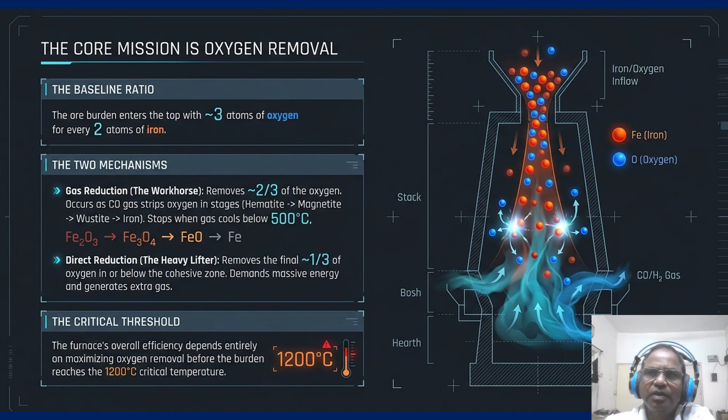Now, coming to the permeability bottleneck, the furnace speed is dictated by the permeability bottleneck. As we all know, to keep the process moving, blast pressure must accelerate gas to roughly 200 meters per second at the tuyere. The ultimate resistance is the cohesive zone, where softening ore creates a barrier. To overcome these, the gas relies on the central coke chimney and alternating coke slits to ascend. We must remember that the fastest burden descent always occurs exactly where the gas can create most voidage.

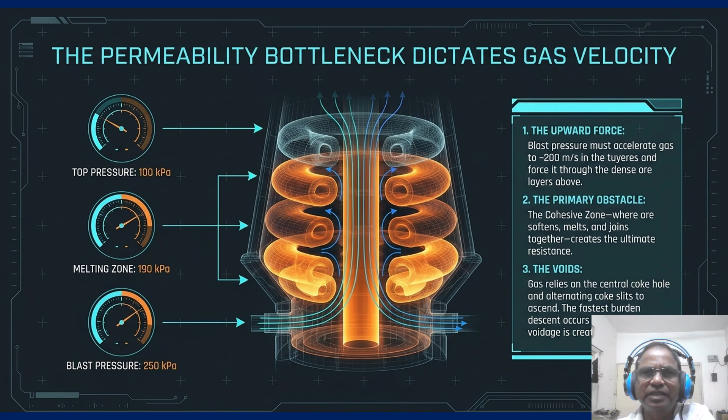Now, as you can see, the two profiles, that is the two signatures, we typically see two distinct flows, that is central working and wall working. Central working or the inverse V is our goal because it utilizes many active coke slits and keeps heat away from the shell. The wall working, the W shape, is dangerous. It forces gas to the wall, leading to high wall wear risk and vulnerability to water leaks. As operators, we must recognize these signatures early to protect the refractory and maintain a stable flow.

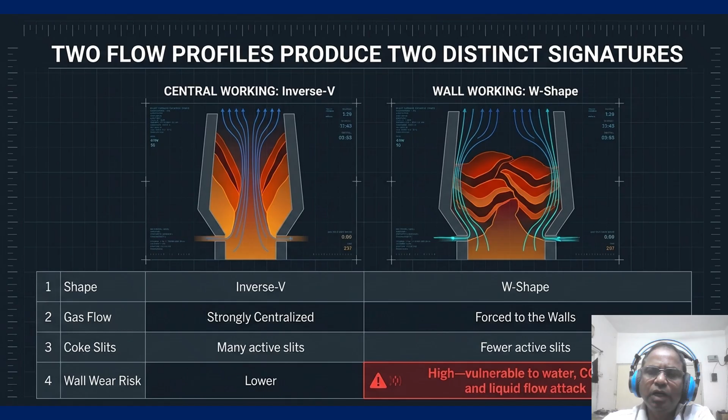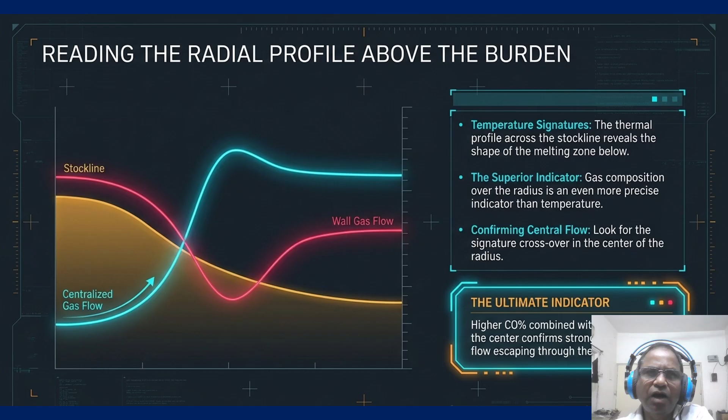Now, coming to the reading of those radial profiles, that is, above the burden. So to confirm our flow, we look at the radial profile above the burden. While temperature signatures give us a hint, gas composition is the superior indicator. Specifically, look for the signature crossover in the center of the radius. If you see higher carbon monoxide percent combined with lower in the center, it confirms you have a strong centralized gas flow escaping through the coke chimney. These data tell us exactly how our internal inverse V is shaped.

Now coming to balancing the central flow trade-off. So there is a constant trade-off in the central flow. The benefit of the central flow chimney is vital. It guarantees permeability and protects your walls. However, the cost is energy efficiency. If the chimney is too large, excess gas escapes unused, showing up as high top temperature and wasted chemical energy.

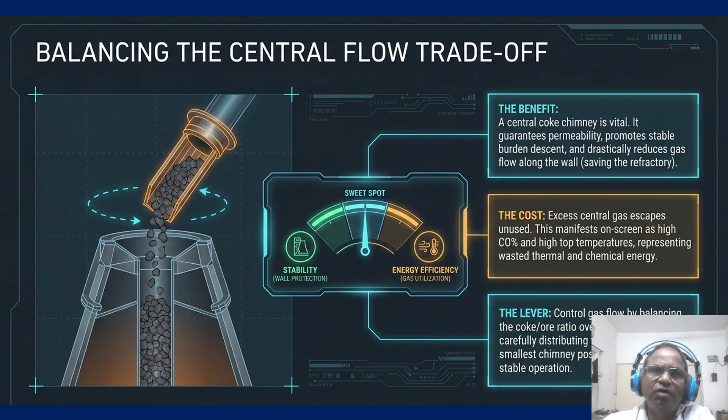Your lever here is burden distribution. By adjusting the coke to ore ratio and carefully placing fines, you aim to maintain the smallest chimney possible that still ensures stability. Tracking the cascade of irregular burden descent.

We must track the cascade of irregular descent before it becomes disaster. It starts with a hanging, where the stock line stops moving because material is bridged in the stack. This leads to slipping, which is the sudden uncontrolled drop when that bridge finally collapses.

Your primary real-time indicator for this is blast pressure. If you see erratic pressure variation while the blast rate is constant, the furnace is warning you of an impending irregular descent. And this also signifies that it is going to affect our production very badly.

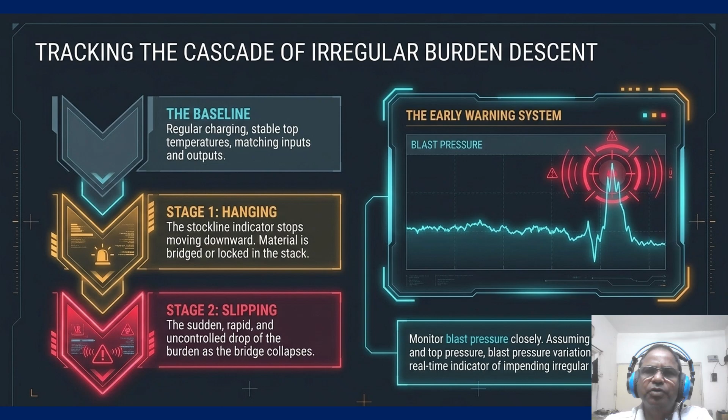So now coming to the high residual liquid choke permeability. When cast house drainage is poor, high residual liquid floods the hearth, choking upward permeability. This liquid rise floods the voids in the active coke zone, creating a massive restriction. You see an immediate rise in blast pressure and a disruption in your top gas ratio.

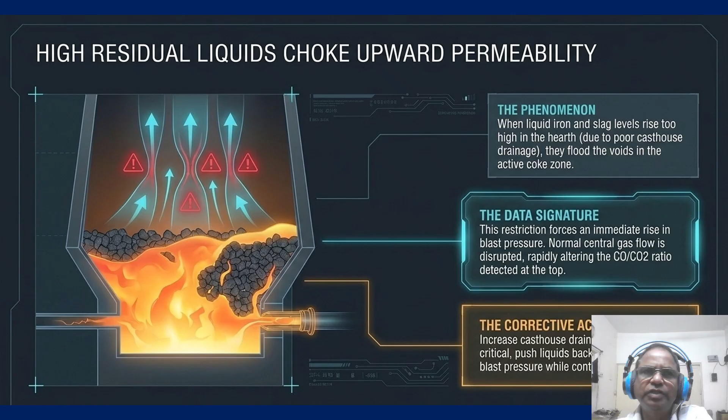The corrective action is immediate. Maximize drainage. In critical cases, you may even need to temporarily increase blast pressure to help push the liquid back down while you continue the cast.

Now coming to the low burden level, which triggers a lot of thermal spikes. Losing your burden level becomes a major threat because it triggers massive thermal spikes. Without enough raw material to transfer heat into, ascending gas remains too hot. So if gas stays above 500 degrees centigrade without sufficient burden, chemical reduction stalls and heat is wasted solely on expelling moisture.

You will see a rapid, severe spike in top temperature combined with chaotic changes in your top gas ratio. When this happens, you must restore the charging rate immediately to capture that heat.

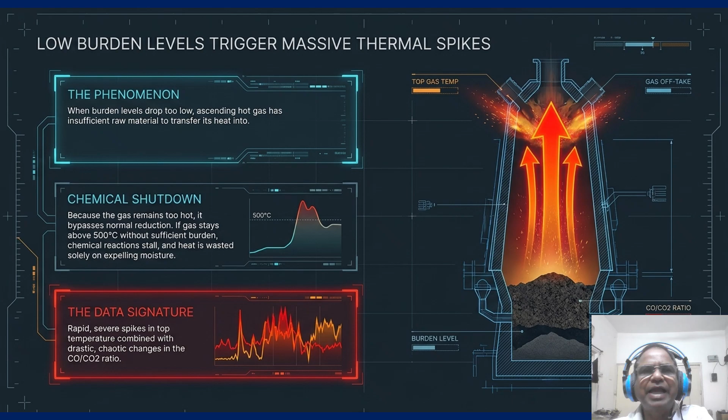Now, defend the 90-degree centigrade top temperature floor. As we have seen, one absolute operational limit is to defend the 90-degree top temperature floor. Falling below this is a prohibited zone, causing gas moisture to condense on internal steel walls. This triggers water attack and refractory damage, leading to premature failure.

Whether you are refilling after a slip or during a blowdown, you must maintain top temperature above 90 degrees centigrade at all times to ensure the long-term health of the furnace shell.

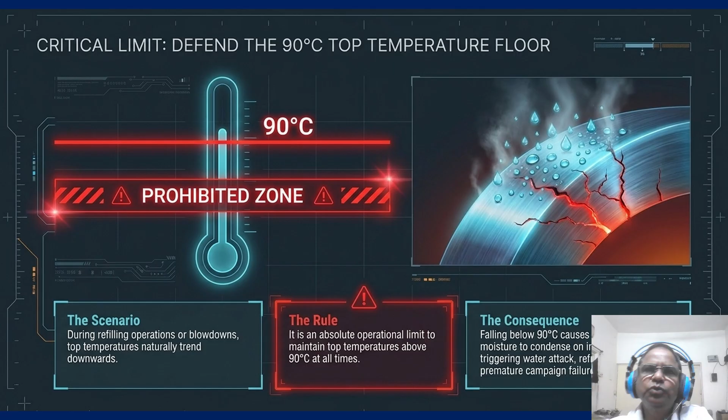Now coming to manipulating the thermal state via tuyeres. We control the thermal engine via tuyeres, aiming for a flame temperature between 2000 to 2300 degrees centigrade. We have three main dials. Fuel injectants, like coal or gas, decomposes to replace coke.

Blast moisture acts as a coolant, effectively extinguishing excess heat if the furnace runs too hot. Finally, blast oxygen directly increases combustion intensity to counteract cooling trends. So remember, lances must be perfectly centered to prevent critical water leaks into the raceway.

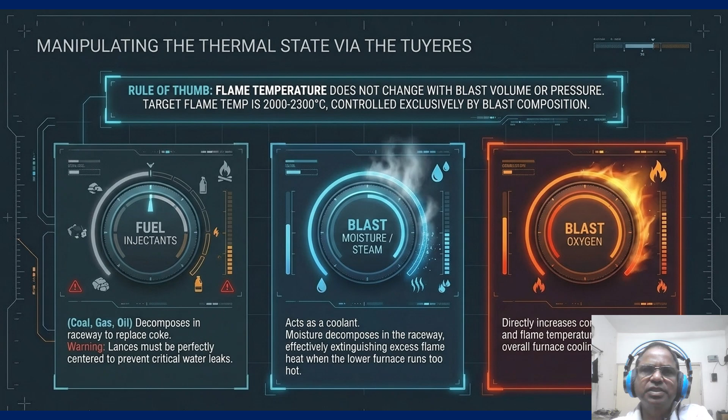Now coming to the operator's diagnostic translation matrix. This matrix is your quick reference guide for converting signal into action. If you see a central carbon monoxide spike, your chimney is too large. Adjust your chute angle. If you see rapid top temperature spikes, your burden is low. Restore the charging rate immediately.

If blast pressure is rising alongside altered top gas, you have a high residual liquid. Maximize your drainage. These charts ensure that every shift team responds to the same signal with the same high-impact levers.

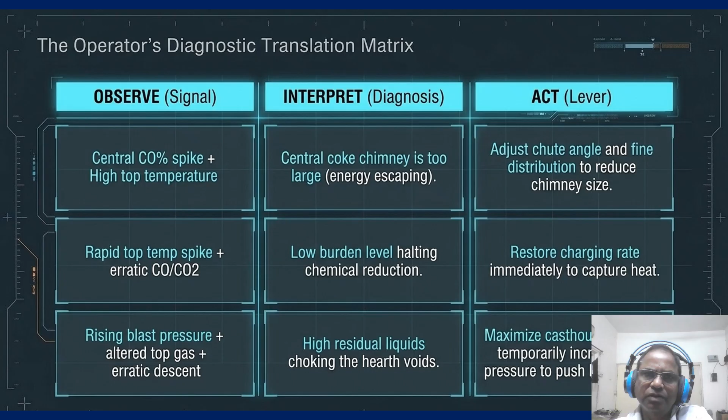Now coming to the proactive command loop. In conclusion, stay within the proactive command loop. Use top gas as your live feed for reduction efficiency, and radial profiles to visualize the cohesive zone. Never allow liquid to choke the hearth, and never let the top temperature drop below 90 degrees centigrade.

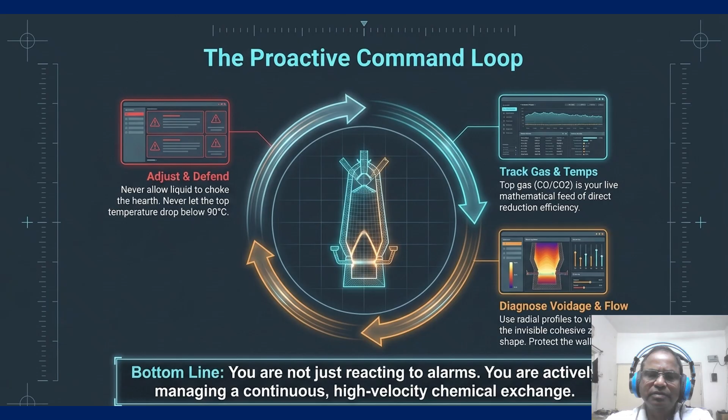The bottom line is this: you are not just reacting to alarms, you are actively managing a continuous, high-velocity chemical exchange. So using and referring to these templates within the team, in a single directional alignment, gives a fruitful result in stabilizing the furnace in the quickest possible time and running the furnace consistently.